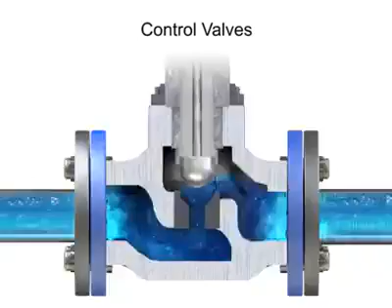Control valves contain two major components: the valve body and the valve actuator. The valve body provides the fluid connections and a movable restrictor comprised of a valve stem and plug that is in contact with the fluid that varies the flow. The valve actuator is the component that physically moves the restrictor to vary the fluid flow.

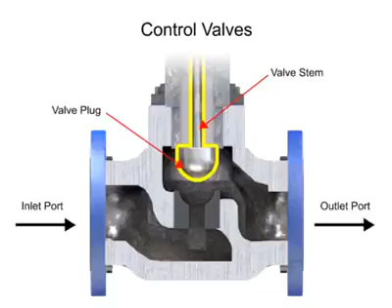Three actuator types are used in control valves: spring and diaphragm, solenoid, and motor. As the name suggests, the spring and diaphragm actuator uses a spring and a diaphragm to move the valve stem and plug.

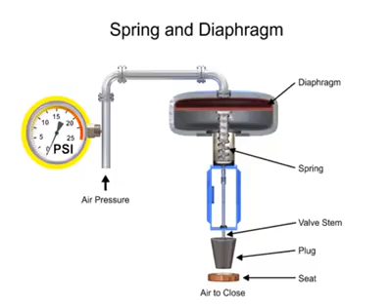A 15 psi pneumatic signal enters the housing at the top of the actuator. As pressure is exerted on the diaphragm, a downward force is applied against the spring, which moves the restrictor. The diaphragm moves until it creates an equal but opposing force against the spring, at which time the motion stops as the plug meets the valve seat.

With no air pressure, the restrictor is pushed upward by the spring to act as a normally open control valve.

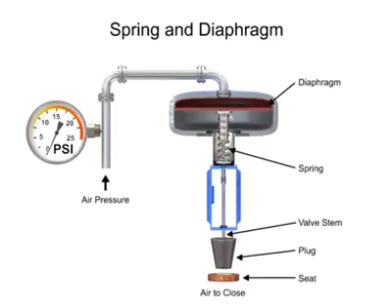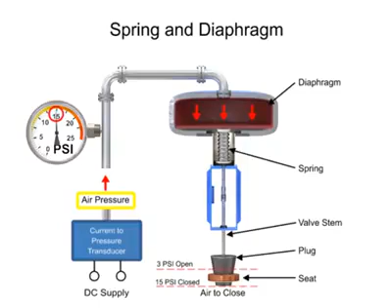To vary the position of the restrictor and flow through the valve, a current-to-pressure transducer can be used to provide a 3 to 15 psi signal to the diaphragm. At 3 psi, the valve is maintained open, and at 15 psi, the valve is maintained closed. Pressures between the 3 to 15 psi range proportionally change the flow of the valve. For example, a pressure of 9 psi applied to the diaphragm moves the spring and valve stem to 50% of operating range.

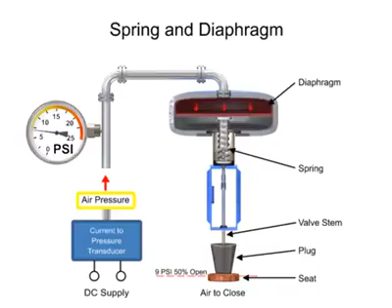For on-off control of the valve, a solenoid is used to actuate the valve to a fully closed or fully open position. Applying current to the coil generates a magnetic field that moves the plunger downward against the return spring.

With zero current applied to the coil, the spring pulls the plunger upwards to the fully open position for a normally open state control valve.

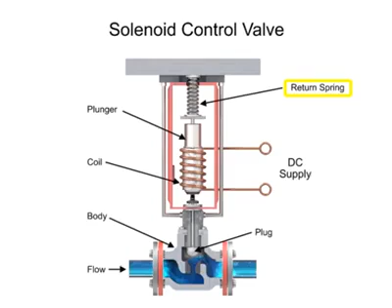Another method for variable valve positioning uses a motor and is referred to as proportional control mode. Using a gear motor attached to the valve stem, a servo amplifier provides a DC control signal that moves the valve to the desired position.

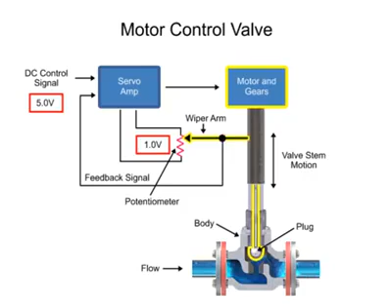Feedback is achieved with a wiper arm attached to the valve stem that sends a signal back to the servo amplifier where the position is monitored. The servo amplifier drives the motor until the control signal is equal to the feedback signal.